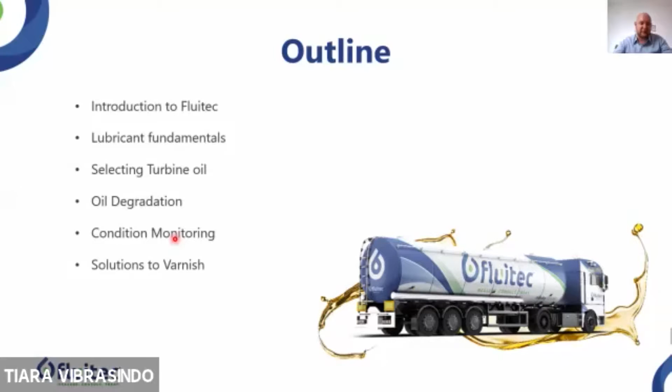We will share our knowledge on monitoring the condition of turbine oils, how you can prevent breakdowns, and we will present our solutions to varnish. It's quite a lot of content, quite a lot of topics to put into 1.5 hours, so I need to keep the speed and will probably be a little quick. But as I said earlier, if you have any questions, please don't be shy to chat with us, and we will follow up when we can.

To introduce Fluitec, we are on a mission, I should say, to achieve Fill for Life. Now, Fill for Life is a big goal. It's difficult to reach, but that's why we are in business. We want to extend the fluid's lifetime in the equipment to a point where you don't have to change it anymore.

We are not there yet at the moment, but we are getting close. And by doing this, we have actually been approved by major gas turbine OEMs. We have saved more than 1.5 million gallons of oil from being wasted prematurely.

9 out of 10 global oil companies actually use or recommend Fluitec solutions. We are doing business in over 100 countries on six continents.

And probably the most important is here in the middle, we have managed to reduce more than 100,000 tons of CO2, which is documented. In reality, it's probably more. And by using our solutions, our customers, the end users, have documented more than $100 million

of savings. And we've also managed to save a lot of days of outages for our customers, the end users. For example, in the power generation industry, it can save a lot of value if you don't have to do a lengthy shutdown for preventive maintenance.

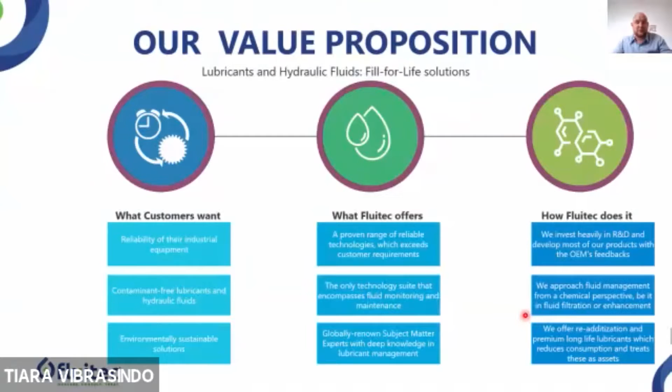And we approach fluid management from a chemical perspective. That can be treating of fluids or filtration, chemical filtration of fluids. We offer re-additization and very premium long-life lubricants, which reduces consumption and reduces the downtime of your assets.

So the product line that we have - recently we have added the product line called Education, because we have found that our knowledge is actually an asset that we can share with the industry and our customers through this kind of webinars. So that's called Education.

We have Lubrication Academy as our own webinar, and the virtual summit which we held last year will be held this year as well. The other one is condition monitoring, to monitor the conditions of lubricant.

We have invented Ruler and MPC, which are according to ASTM standard and recommended by major OEMs. Contamination control products are unique products to filter out oil degradation byproducts and to prevent the formation of varnish in your system. And Solvencer is either deposit control, contamination control, or the replenishment of depleted additives such as antioxidants.

So we have a wide range of products available. So by doing this, the way that we do it is different from how it is traditionally done.

So traditionally there has been low analysis and low frequency. There's a lack of data related to oil analysis on our customers. Aggressive cleaners are being used, and they replace lubricants whenever the additives are depleted, or when the lubricant becomes spent, it just gets thrown away and a new lubricant gets into the system. Filtration media basically has not changed since the 1950s and are actually not so efficient for current day standards. There's frequent oil changes and no warranty given by any oil suppliers on degradation.

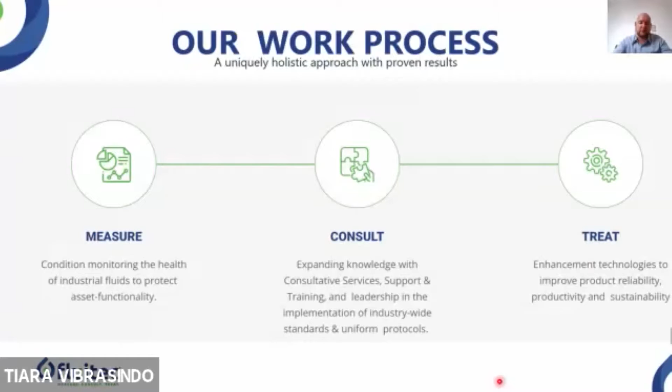The reason why customers trust us is because we have unique and superior products. There is no other company at the moment like FluidTech that can offer this wide and holistic view on things. Sure, there are specific competitors in certain areas, but we have a unique view from our specific experience in lubricants. So that's how we can tailor our solutions to each customer.

We prioritize science. Of course, we are a commercial company, but we develop our solutions on a scientific basis and with science in mind. We have 25 years of proven track record and industry-specific experience, and we are recommended by major OEMs and major oil companies.

And by doing what we do, we add value. We increase the customer's efficiency and the reliability of their production facilities. And by doing so, we actually create a very unique return on investment on our solution. In many cases, it's not difficult to calculate how much our solutions will save the customer in money and also efficiency. Our unique approach ensures a risk-free solution.

By using our experience and by tailoring our solutions to the customer, it is risk-free to use. So our legacy is that we want to achieve zero industrial waste. This is something that major economies are now looking into, a circular economy. Instead of consuming things and throwing it out, we want to reuse and extend the life cycle of industrial fluids and contribute to the zero industrial waste and circular economy environment.

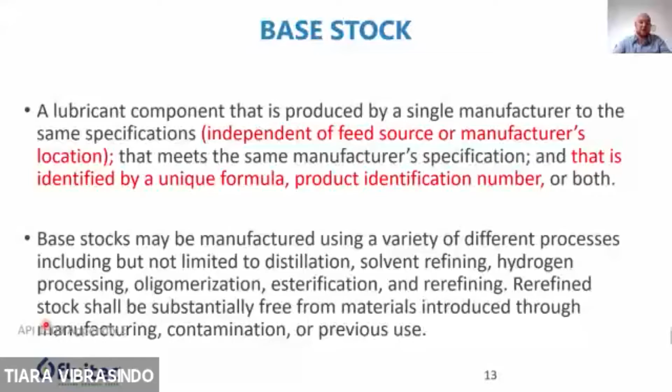So the base oil is very important because it is the platform on which the additives ride. So the base oil is performing the major functions of the lubricant. It provides a lubrication film, it provides the minimum viscosity, and it needs to be strong, stable, and inert.

It needs to be non-damaging to your equipment, and it needs to be kept clean and pure. So very important about base oil is the lubricant cannot perform without a clean and pure base oil. And this is very important, and I want you to remember this today. If there's anything you take away from our presentation, please let it be that the base oil in our lubricants needs to be clean and pure for the lubricant to perform.

And this is the basis of everything that Fluitec does. All our solutions are tailored around keeping the base oil clean and pure, so it can provide its major function as the backbone of every lubricant.

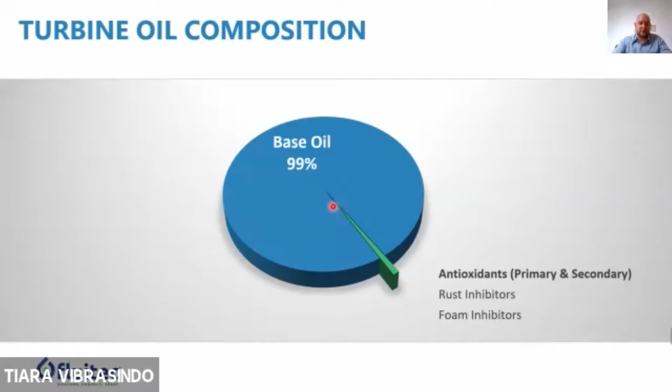Now, if you look at a typical turbine oil composition, you will realize why the base oil is so important, because it consists of 99% of a lubricant. So most of the performance of a turbine oil comes from its base oil. The rest is mainly antioxidants, rust inhibitors, and foam inhibitors. Relatively simple composition, but it has a very important job because it goes into high-valued assets such as big turbines in power generation units, for example.

So a little bit about the different base oil groups. There has been an evolution in the lubricant market, or maybe even a revolution, because most of the formulations over the past 10, 15 years have gone from a group 1, which is crude oil that has been subjected to solvent processing, solvent extraction. That's the way it is refined, and this leaves some unsaturated and polar components in the base oil, and you can see this from the color as well. It is a bit lower in purity than a group 2.

So we moved from group 1 to a group 2 over the last 10 to 15 years. Now, group 2 is a base oil that is refined by process conversion of molecules. This removes the unsaturated and polar components, so it has a higher purity. With this higher purity, it increases the oxidation stability because it reacts better with antioxidants, so it will be better suited for applications that require good oxidation stability, like a turbine oil, for example. It has very low aromatics.

Now, there's a little bit of a downside to this. A group 2 may have some solvency challenges versus a group 1. This becomes an issue when you think about varnish, because when varnish starts forming in your oil, previously a group 1 could keep it in solution and it was harmless, but a group 2 might not be able to keep it in solution, and it becomes varnish and attaches itself to the metal, and that's where it can be harmful. So this change from group 1 to group 2 has significantly increased the varnish problems that we have seen in the market.

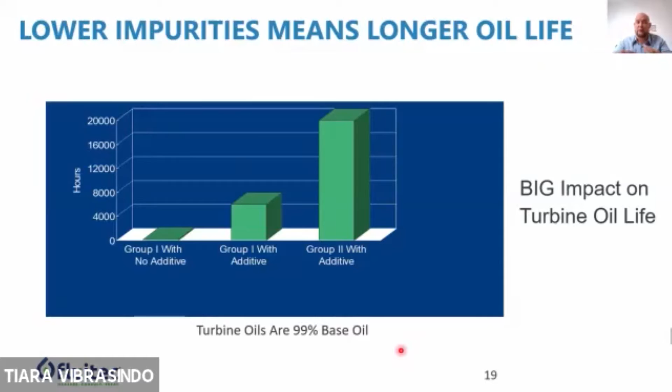And this is why we use a group 2 today, because oxidation stability is more important than solvency. But the downside, the price that we pay for this, is that we have more varnish in our system. So we need to put in a little bit more effort and investment into managing the oil in our system.

Another oil that's being used is a group 4 PAO, which are synthetic molecules, also called designer molecules. They have performance benefits in terms of temperature stability and even better oxidation stability. But they are even more limited in terms of solvency. They are the purest base oils in the market, so they lack some of the lubricating properties and some solvency. Also, another challenge with group 4 synthetics is that they are challenging to formulate with because of these properties, but also that they are not as widely available as mineral base oil because they need to be produced, they need to be synthesized. The availability is much lower, which of course, supply and demand, leads to a much higher price for synthetic base oil. So that's why you don't see them so much in turbine oils these days.

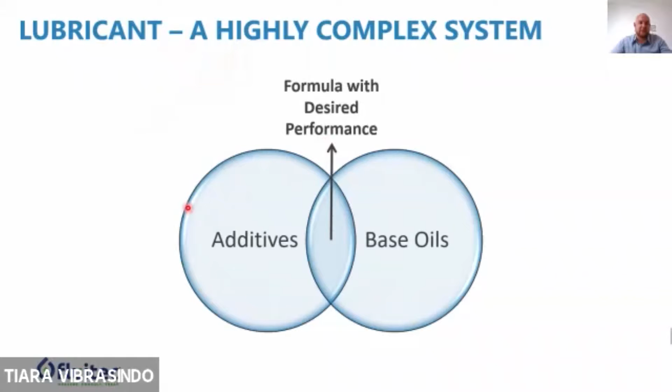So I want to talk a little bit about the lubricants in general. It's a highly complex system, a combination of a careful selection of additives which need to be tested thoroughly with the right base oil. This is more difficult to do than it looks on paper, and things need to be properly tested and performance needs to be evaluated, and then you end up with a formulation which hopefully will have the desired performance. So it's always a combination of chemistry and base oils.

The main function of the additives is to prevent oxidation, because oxidation is a degradation of the base oil. If you remember from our previous slides, it's important to keep the base oil clean and pure. Oxidation occurs when oxygen molecules attack the petroleum fluids, and they literally start to degrade the hydrocarbons, the molecules of the base oil. This leads to free radical acid formation, sludge and varnish formation. Eventually the oil will thicken and the lubricant will start to decompose altogether.

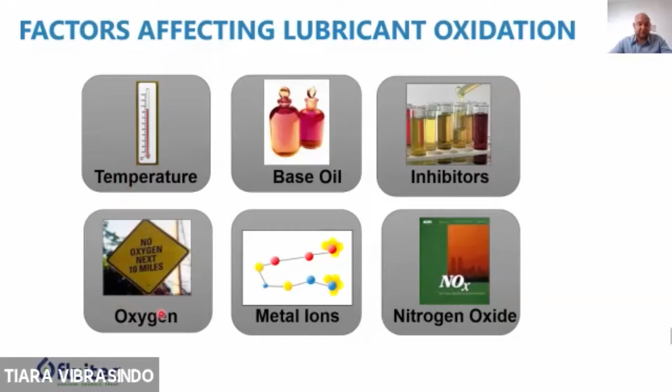This is the main enemy of any turbine oil, because it's accelerated by environments found in a turbine oil, such as temperature. Type of base oil will be important to the way it oxidizes as well. The amount and type of oxidation inhibitors will be very important to the rate of oxidation of the oil. The presence of oxygen, which is almost everywhere, metal ions, and nitrogen oxide - these are the factors that increase oxidation of an oil. And of course, temperature, oxygen, metal ions, these are all present in turbine oils.

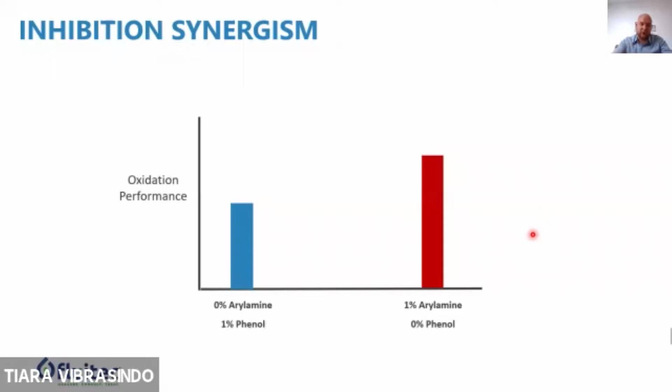So if you look at antioxidants, you say, why don't you just pack the oil with antioxidants? Well, it's always a synergy that you're looking for. You cannot just pack, for example, arylamine or phenolics - you want to have a combination of both because this gives you the best performance. You can see here 0.5% of amines and 0.5% of phenolics give you a better performance than 1% of each of those. So we're looking for the synergistic and enhanced performance.

You might also wonder, why don't you just increase the amount of antioxidants in your oil? Well, the answer to that is technical, but also economical. From a technical standpoint, antioxidants are molecules that deplete over time. Typically you have one antioxidant and one free radical, and they battle with each other, they cancel each other out. So if you have one free radical that's neutralized, you also lose one antioxidant molecule. When this antioxidant molecule gets inert, it can become something else - sludge, varnish, or any other degradation byproduct, or even a free radical over a long period of time. So you also want to limit the amount of antioxidants you put in your system, because it can lead to a problem over a longer period of time.

Another factor, of course, is cost. If you increase the amount of antioxidants, antioxidants are expensive, so the formulation cost shoots up immediately, because the antioxidants are by far the most expensive chemical in turbine oils.

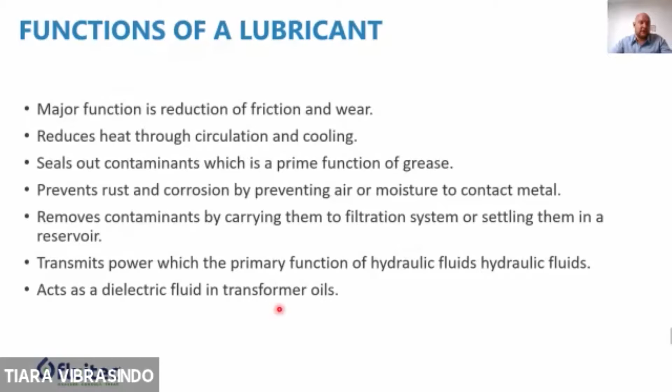It actually has a cleaning function, which is lesser known, but it helps to keep surfaces clean and helps to take away contaminants and settle them in a reservoir. In some applications, a lubricant is also a power transfer fluid. Think of a hydraulic fluid, where the piston transfers power through the lubricant. Also in an ATF, an automatic transmission, part of the power is transferred by the fluid itself. In transformer oils, it can also serve as a dielectric fluid.

I want to talk a little bit about different lubrication regimes, for you to understand what lubricants typically do. One of the severe regimes is called boundary lubrication, where you have mixed metal-to-metal contact, a very thin layer of lubricant, very high pressure, high load on the surfaces, and slow speed. These are environments typically found in gear oils, for example.

Here you need a lot of surface active chemistry at the contact points to prevent the metal from wearing off. You need a lot of extreme pressure additives, anti-wear agents, and friction modifiers. So it's a very specific formulation.

Another very challenging formulation is mixed film lubrication. Here you have a combination of metal-to-metal contact, but also a little bit of hydrodynamic lubrication. This is probably the most challenging formulation because you need some surface active chemistry, wear resistance, and friction modifiers, but you also need good hydrodynamic properties of the lubricant. This is an environment typically found in engine oils, for example. That's why engine oils are extremely difficult to formulate.

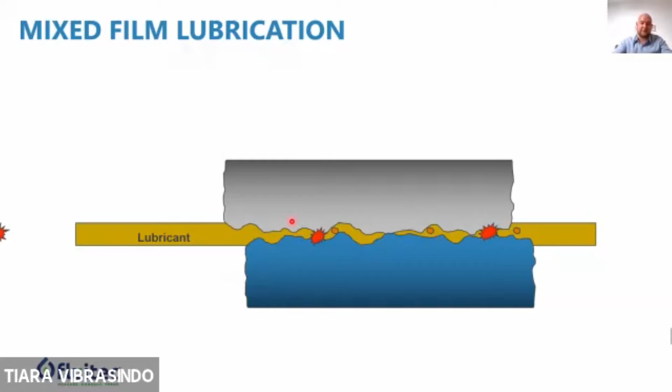Now, the most common form of lubrication in turbine oils is actually hydrodynamic lubrication, meaning there is more space between the metal surfaces and the lubricant fills up the space, and you only have lubricant as a film. There's no metal-to-metal contact present. Typically this is in applications where you have high relative speeds between the metals. You can imagine in a turbine or in a bearing, for example, those have hydrodynamic lubrication. So in turbine oils, we look at hydrodynamic lubrication.

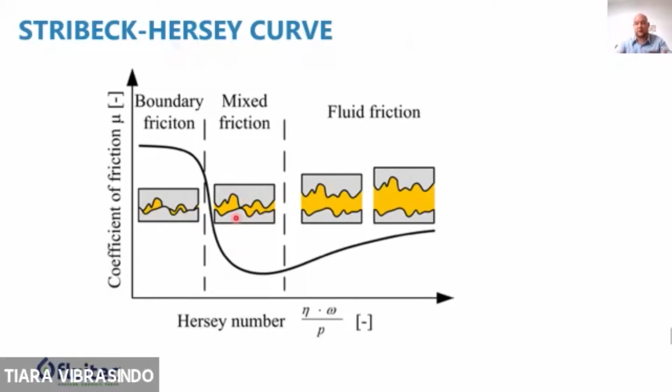This is just to explain to you, if you look at all these different lubrication regimes, you have boundary friction, mixed friction, and fluid friction. They all have a different coefficient of friction and a different relative speed to each other. That's why you cannot use, for example, a gear oil in an engine oil and the other way around. They won't work - the metal will start to degrade and it will break down the machine. So it's very important to use the right lubricant for the right application.

That's basically the main message of this section. So when we look at lubricant functionality, we always have to balance out the properties, because you can go all the way to the side of performance. We can formulate synthetic fluids packed with high-end chemistry inside, and the lubricant will almost not degrade and will not cause any problems. But then it will be way too expensive - it doesn't make sense to use it anymore.

And also you will run into availability problems, because highly synthetic molecules are limited and difficult to produce. So you cannot make enough of it to supply the whole world. Availability is also a major problem. But in general, it will be a balance between the performance of a lubricant and the cost. That's why you're always looking at balancing the formulation in these areas.

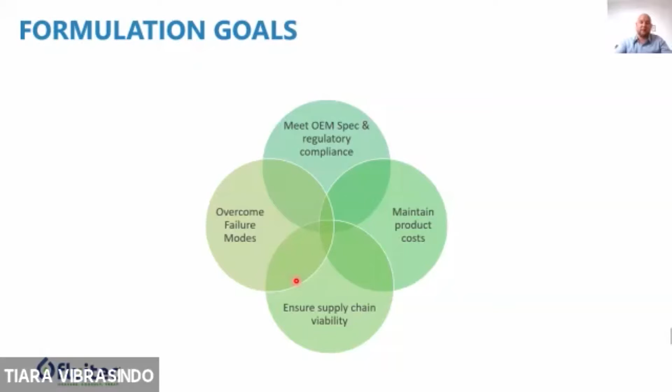You have the OEM, it needs to meet the OEM spec, it needs to have chemistry inside which is regulatory compliant. You cannot have heavy toxic chemistry inside, for example. It needs to be registered safe to import, because if not, customers cannot use it. It needs to overcome failure modes in the application, it needs to have an attractive product cost, and it needs to ensure supply chain viability, so it needs to be available worldwide. So this is a challenging prospect.

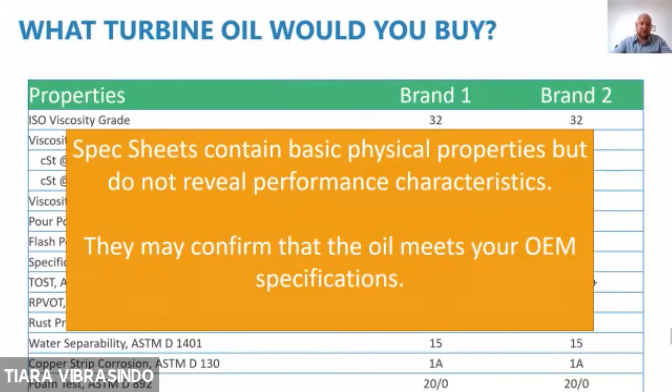They may confirm that an oil meets your OEM spec. So if on a spec sheet it says this oil meets OEM A, B, or C, okay, fair enough, that means the oil is tested for the application. If this is the spec recommended by your OEM, then this oil should be suitable. However, please do not select turbine oils based on spec sheets alone, and don't look at TOST or RPVOT as the sole indicator for oxidative resistance or lifetime of the oil, because it's much more complex than just these specifications.

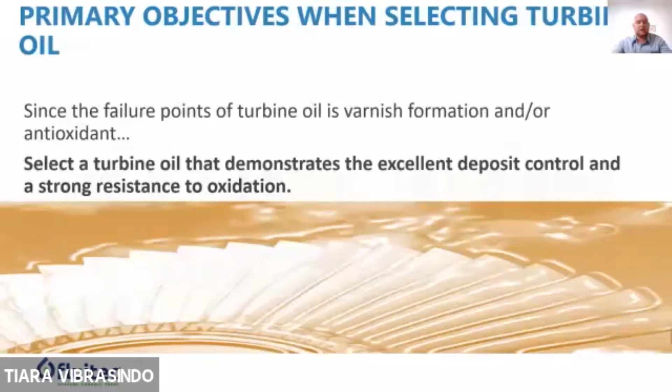So you want to be collecting relevant performance data. Because of the challenges we've seen in the market, we've developed an in-house test to determine which turbine oils demonstrate excellent deposit control and have a very strong resistance to oxidation, because these are the most important characteristics of a turbine oil. So we ran a couple of oils through our TOPP test, which is the Turbine Oil Performance Prediction Test. It's a test designed by FLUITEC, simulating real-world conditions, and a good test to evaluate the actual performance of an oil.

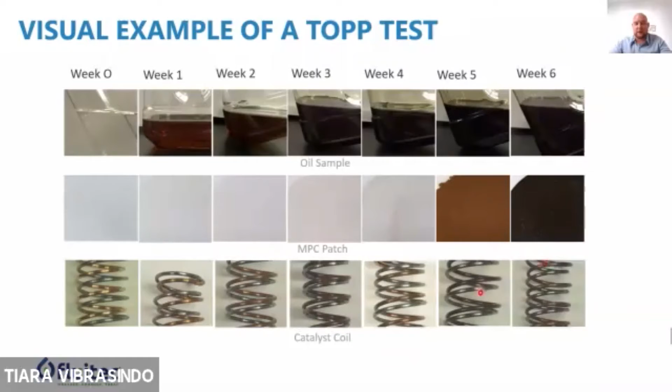Example of a TOPP test: after 6 weeks of thermal stressing, you see that the pure oil becomes very dark in color. You see the MPC patch turning dark as well. The MPC shoots up, and the catalyst coil that is used to increase oxidation - you can also see color changes on the metal there. So this is an example of a very poor performing fluid.

And if you look at what is mentioned on the data sheet, on the spec sheet of this fluid, it will say unique additive system, best deposit control turbine oil on the market. So a lot of these things are mentioned, but in the real world environment, they do not always hold value, because you can see the varnish potential of this oil is extremely high, and you do not want this in your system.

So if you run all these tests and collect all this data, how can you use this to come to a decision? We tested 9 commercially available turbine oils for 6 weeks, measuring oxidation resistance and deposit control. Results were compared, MPC values measured, and RPVOT compared to new oil using the Ruler test to determine remaining antioxidant level. By comparing this to new oils, we came up with an oxidation resistance index.

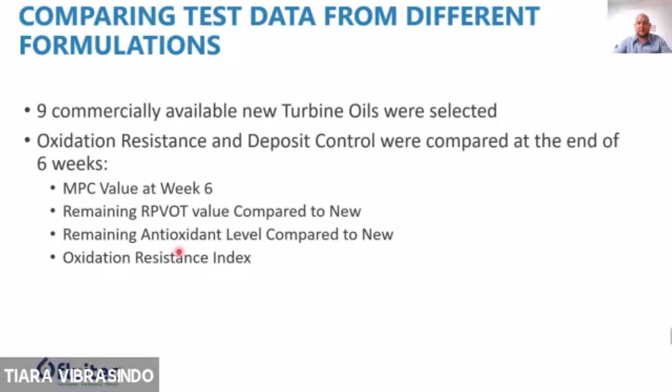So if you use this data to make decisions, it makes sense to come up with a ranking. What is important to you? Different production sites, environments, and applications can have different factors that are more or less important. For example, if you expect 15 years of oil lasting, you'll look at expected oil life, oxidation stability, and deposit control. If you want to change oil every 2 years, price may be more important. If you need a lot of technical support, then that will be more important.

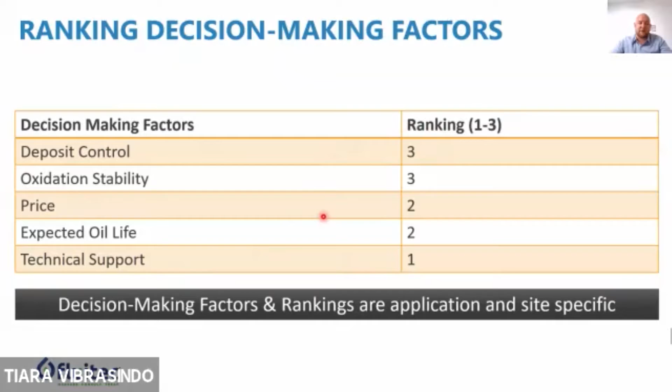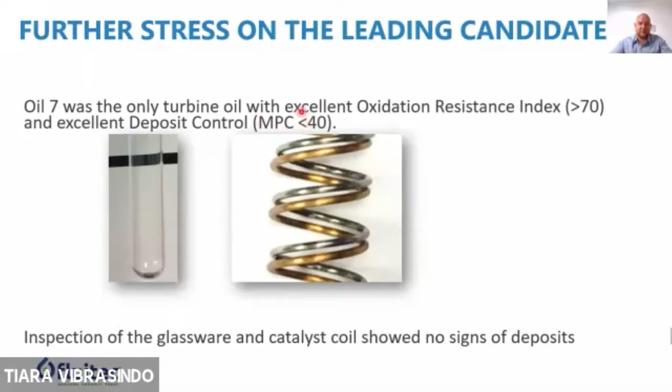We took brand 7 and further stressed it. We observed excellent oxidation resistance index and excellent deposit control, and inspection of the glassware and catalyst coil also did not show any signs. If you compare that to the poorest performing fluid, you'll see the catalyst coil is heavily varnished, the test tube itself was heavily varnished, and the MPC patch is almost black, with deposits already forming. So pretty bad.

The winning candidate, sample 7, was stressed for an additional 18 weeks, and the MPC value remained in the normal range with no signs of deposits found. This candidate was actually our own formulated Infinity fluid, formulated using Solvancer technology, which is very stable in terms of deposit control and does not form any deposits throughout the life cycle of the equipment. That's why this oil gives you long-term deposit control.

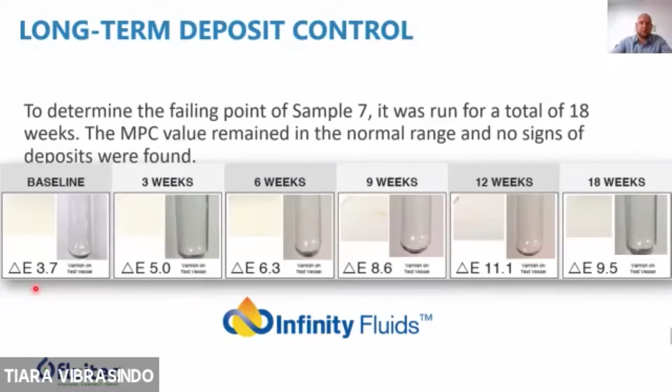So just to summarize this section: when we select a lubricant, the first step is to determine the primary failure modes of the application. You want to know how your application fails — how does a turbine fail, how does a compressor fail. For example, in turbine oil, the main failure modes are related to varnish formation and/or antioxidant depletion.

It's typically deposit formation inside your system, which leads to temperature spikes and vibration. In the end, the lubricant will degrade to the point it cannot perform its function, and your system will break down. Antioxidant depletion will lead to oxidation of your equipment, and as such will lead to breakdown. So this is the most important thing you want to measure in a turbine oil.

So you have to develop test data or ensure that the lubricant you're using is tested according to its ability to overcome these failure modes. It makes sense to develop a ranking matrix as we have shown, and you should select the oil that provides the highest value for your application and for the way that you intend to use it.

So we have completed now the section of selecting turbine oils. Now I will go a little bit further into oil degradation. I would like to show and share with you how oil degrades in turbine oils, and what are the primary failure modes that you see.

For turbine oil degradation, there are a few major factors taking place. Number one is oxidation, as we explained - that's a very important degradation mode. Another one is thermal degradation, which can happen through static spark discharge. When you have a filter and the oil passes by it, there can actually be spark discharge, creating hotspots.

Microdieseling is pressure-induced thermal degradation - I'll explain that a little bit further on. Hotspots in your system can lead to accelerated degradation. External contaminants such as gas, solid particles, or water, and other modes of failure and degradation can be drop out of the additives or incompatibility. We'll look into these a little bit more deeply.

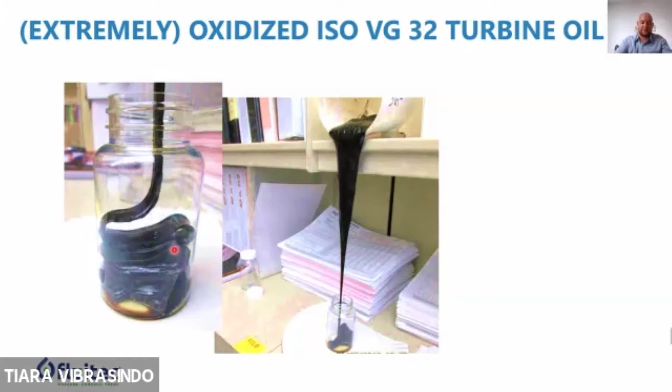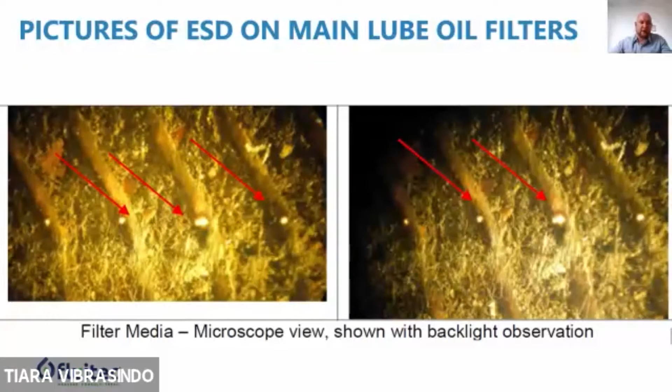So here you see the effect on the main lube oil filters of electrostatic discharge. You see the coking, the carbonization materials getting stuck in the filter. Here also you see the particles on the filtration system.

Another common thermal degradation is through hotspots. So you'll get carbonization of a layer of oil that is being subjected to high heat. So you get changes of the molecules, and then it cannot perform its duties anymore. And it will lead to lacquer and carbonaceous deposits forming inside your system.

So let's stop the video.

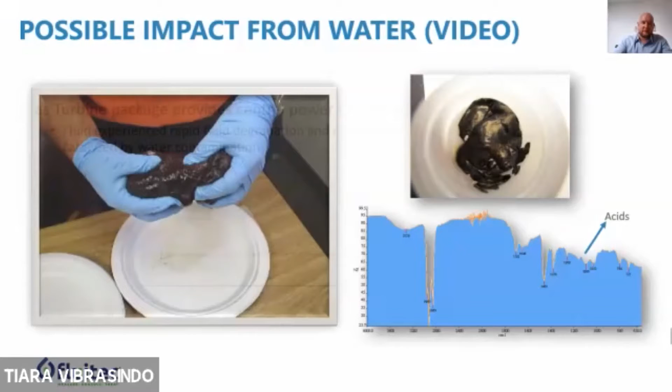So that's an extreme example of water in the system, which leads to extreme oxidation, because water can act as a catalyst, and you'll see the viscosity of the fluid shooting up to a point where it actually becomes kind of a goo. And here in this graph, you can see that this is actually done through acid formation.

We analyzed this goo, so to speak, and we found out that there were certain acid formations that were causing this. So you need to install, for example, acid scavenging materials to prevent this from happening.

So here you see a gas turbine package that provided power to a university campus. Again, sudden fluid degradation due to extreme oxidation, which was catalyzed by water formation and water ingress.

It's also very important to flush systems that have been having these kind of issues, because there will be residual deposits and varnish in your system. So before an oil change, you can add the Boost VR, which is our product, which will help to clear the system before an oil change, but you can also flush during your downtime.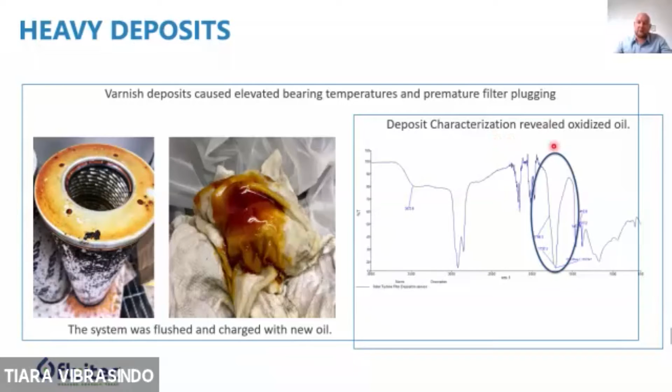Deposit characterization revealed that this was caused by oxidized oil. Here you can see in the steam turbine on the tube there is residue which inhibited the equipment from performing, and we have analyzed the deposits and we saw that they were acids and silicas, and so also a result of oxidation leading to deposits here.

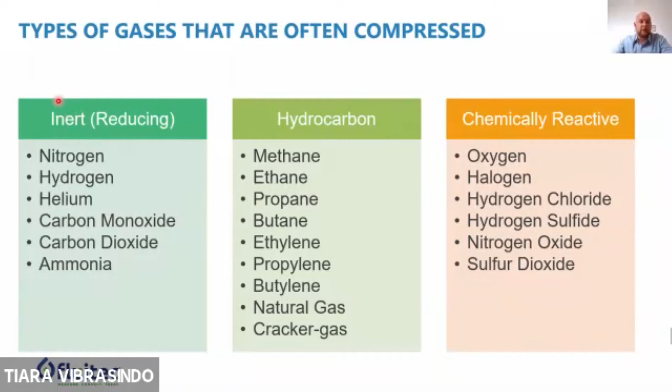So there are a lot of gases that are often ingressing into turbines. Now there is this old knowledge that says inert and hydrocarbon gases have no chemical effect on the oil. This is one of the fights that we are fighting in the market, because this conventional wisdom is actually not correct. Because we have found through our experience that inert and hydrocarbon gases can actually chemically react with the oil, and they actually lead to some of the most severe degradation situations that we have seen in the market.

So, for example, if you look at an inert gas such as CO2, it can actually react with water to form a carbonic acid. So oil has, for example, 8 to 12% of air, 21% of which is oxygen. So you can imagine that this is already a reaction product that's by design basically always in your oil.

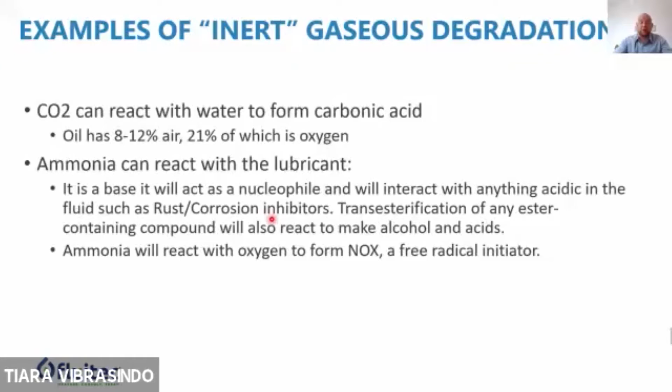Ammonia can also react with the lubricant. So if ammonia reacts with the lubricant, it will react with anything acidic in the fluid, such as rust and corrosion inhibitors, and it will react with those to make further acids and alcohol, which will degrade your system. And ammonia will also react with oxygen to form NOx, which is a free radical initiator.

So here we have an example of this in the real world. We actually have a case study by a nuclear power plant in the US, which had 2,700 liters of ISO 32 turbine oil, an MPC value of 16, and ruler phenols were at 75%. But it experienced pump valve sticking, and the unit had to be shut down for 30 hours to investigate the problem. Now, 30 hours for a power plant, as many of you will probably know, can run into extreme costs.

So here we have documented that it's about 1 million dollars US that was caused by this outage. So a high-profile root cause analysis was performed to determine and to fix the cause. Of course, in this situation, the customer will not spare any expense to get to the bottom of this and prevent this from happening again.

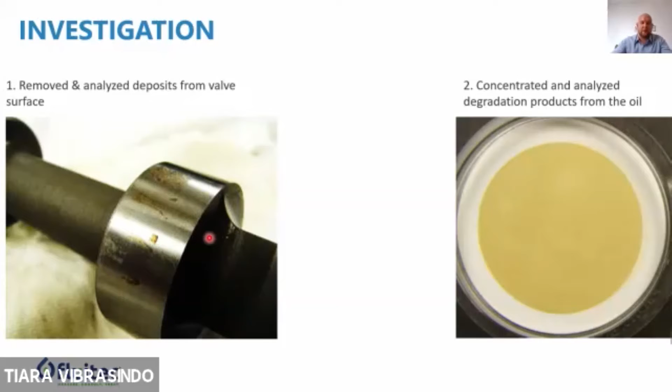So we have removed and analyzed deposits from the valves, as you can see here, and we concentrated and analyzed the degradation byproducts from the oil. The chemistry of the deposit from the valve matched the deposit in the oil, so we know that the problem that led to valve sticking is actually coming from the oil. That's what we determined here.

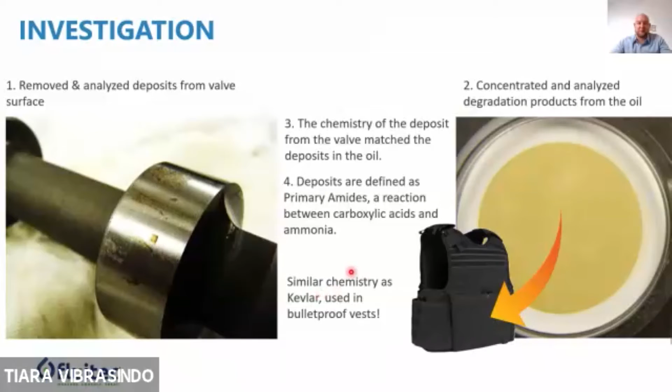The deposits are defined as primary amides, a reaction between carboxylic acids and ammonia. These are byproducts of oil degradation, primary amides, and they react with ammonia to form these deposits. So the chemistry being formed in the lubricant is actually similar to Kevlar, which is used in bulletproof vests. So you really don't want to have this inside your system.

So the conclusions and action that we took: ammonia was present in the plant's steam, which was a result of the way it was produced. So you have carboxylic acids plus ammonia forming chemically related deposits consisting of amides. It was not feasible to remove the sources of ammonia from entering the system, because that's just not possible for this plant.

So what we did is install a system to remove oil degradation byproducts, which are the carboxylic acids. So we removed this part from the basic chemistry of the oil, so this reaction cannot take place, and the deposits are not formed. In addition to MPC, the plant is also monitoring with FTIR to measure the acidic content and keep check of amide production. So here we have stopped the problem at its core, and of course this customer was very happy with this.

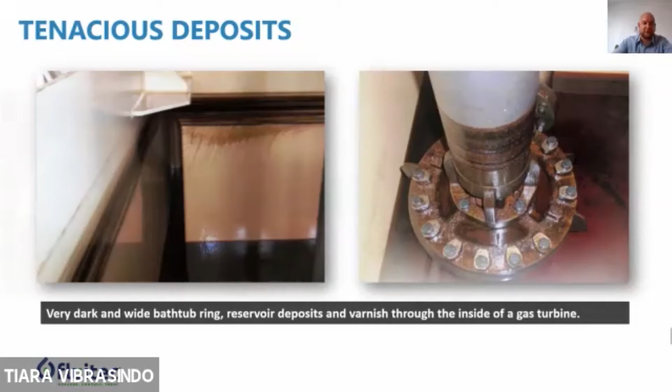You can see here how it looks on the piping, so you can imagine this can lead to issues. Also, this kind of deposit is like lacquer, so it's impossible to wipe off. You need to use heavy chemicals to remove it, which is not advised, because even residual chemicals can go into your oil and prevent it from performing its duty. It's never advised to use detergents in cleaning of oil tanks.

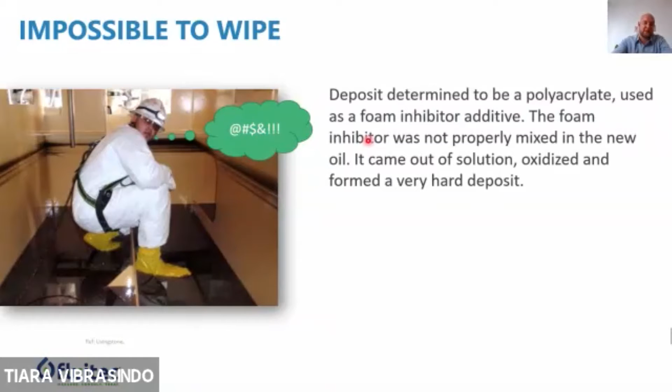So here you see a worker trying to clean the varnish that is in the system. In this case, the deposit was determined to be a polyacrylate, used as a foam inhibitor additive. So it's actually an additive in the formulation that came out of solution, started oxidizing, and formed this very hard deposit.

Another use of polyacrylate absorbent material is actually in baby diapers. So the chemistry is very interesting in this.

New formulations have various base stocks and additive components, as we discussed earlier, and they are not always compatible with each other. For example, most group 5 base stocks are not compatible with mineral oil. Old foam inhibitors may not be compatible with newer type foam inhibitors — they have different chemistries, so they cannot always mix. Different kinds of rust inhibitors can also be incompatible. Overall, mixing different chemistries is never advised.

Even if you test two new oils together and they might be compatible, if you do the same with used oils, you might run into compatibility issues with the same oils, because when an oil is in operation, when it's in service, it chemically changes. So there are chemistry processes taking place inside the oil.

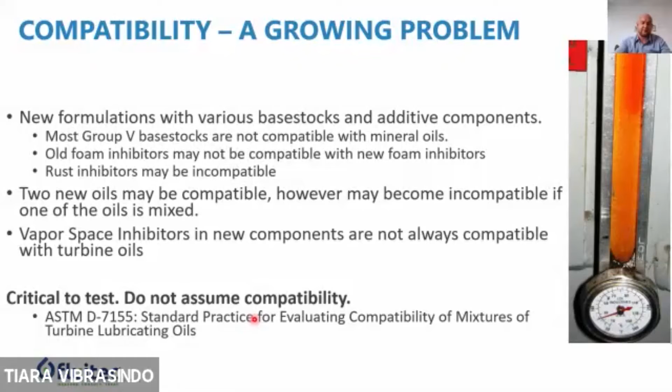So they are different in composition compared to a new oil. Mixing new oils to check if your in-service oil is compatible with another oil will not work. That's why it's critical to test. Never assume compatibility. ASTM D7155 is the standard for assessing compatibility of mixing turbine oils, and our solutions are always tested for compatibility.

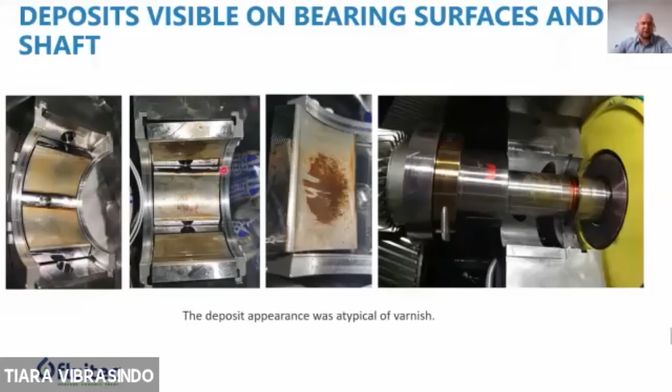But here's an example of a compatibility problem we encountered in a compressor. Six months after installing, the bearing temperature started to go up, and oil analysis results indicated no problem. But after assessment, we saw deposits visible on the bearings and shaft, which were very atypical in appearance of varnish. It was very light in color and looked softer, a little like rust scattered on the metal, but that's not what it is.

It was very atypical, so when we magnified it after solvent extraction, we saw that the varnish deposits were insoluble, and we performed an analysis to determine what they were.

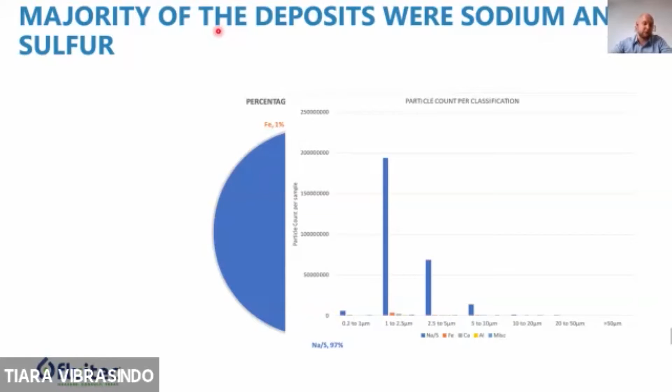The majority of the deposits were sodium and sulfur. Sodium is used as a dispersant in oils, and sulfur is an EP additive. In this case, the sodium could come from the additive chemistry or from external environments, but the sulfur is definitely from the chemistry of the oil.

This typical oil formulation did not contain sodium, but the compressor was not flushed during commissioning, so there was some preservative oil remaining in the system. That's a great example of incompatibility between two different oils. The residual rust preservative oxidized and formed deposits on the hottest areas of the equipment, which is always the area that leads to problems. That's why it's always severe, because the problem will not occur somewhere inert. It will always occur at a critical point where it actually becomes a problem.

So a little summary about oil degradation: it's important to realize that varnish is just a word, but definitely not all varnish is the same. It makes sense to do a root cause analysis to figure out exactly what varnish you're experiencing, how it originates, and where it comes from. There are multiple mechanisms that may cause oil failure and deposit formation, and getting a sample of the deposit can help identify the cause and point to a solution.

We see a lot of operators take pictures, but they don't take samples. This is actually a missed opportunity, because if you keep some of the deposits and have them analyzed by us or by an independent lab, you can find out in many cases what is the cause of these deposits.

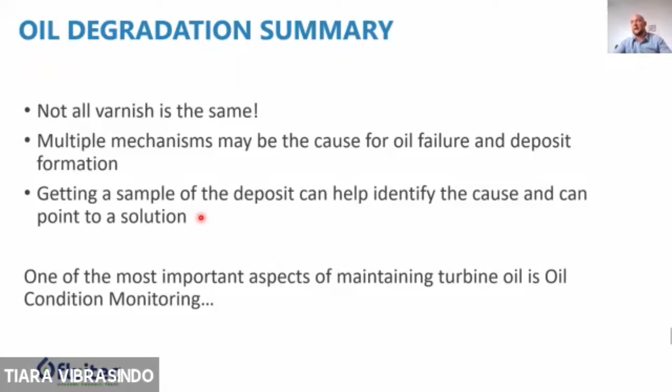So one of the most important aspects of maintaining a turbine oil is actually oil condition monitoring, which neatly brings us to the next topic. I'll check the questions, but I'll try to save them for the end since I'm a little behind on time. So we'll treat some of the questions at the end, and I'll continue now with oil condition monitoring.

Oil condition monitoring starts with sampling; this is always the first step. The objective for sampling is to maximize data density—you want to get as much quality data as you can. You want to minimize data disturbance and have a proper frequency. You can sample too much, which can be detrimental, or more often too little, so you want to determine a proper frequency for your application.

Some considerations for sampling include sampling from a proper location, using the correct sample hardware and sample bottle, and putting in place a correct sample procedure, because with sampling it's very simple: if you put garbage in, you get garbage out. So in order to get usable data...

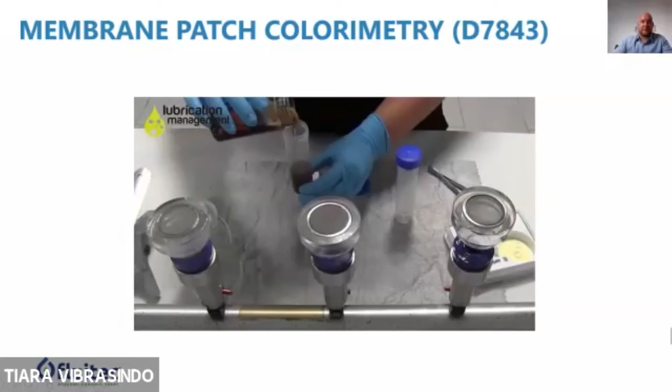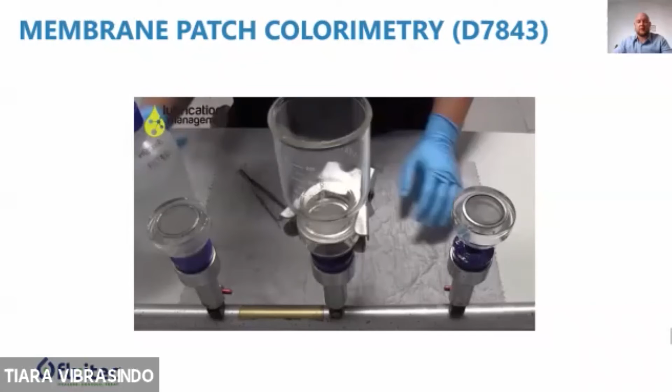But at Fluitec, we have developed an MPC test called membrane patch colorimetry, which is categorized under ASTM D7843. Here's a short video of this test and how it works. You will see that it generates a patch, and you run three parameters to determine the delta, which is then categorized as the MPC value. Here you can see an example of the patch.

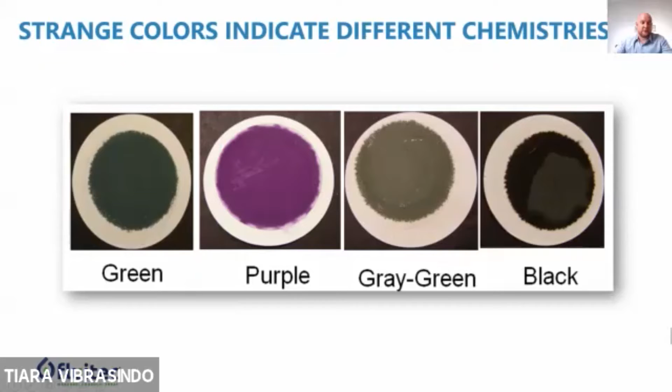And remember, the color of an oil is not always related to the varnish potential, because very often people think when my oil is dark, it will be varnish and I have to throw it away. But that's not always the case. Color change of an oil can be due to various circumstances. Some can be detrimental, some can be very harmless. So oil color is not representative of oil performance.

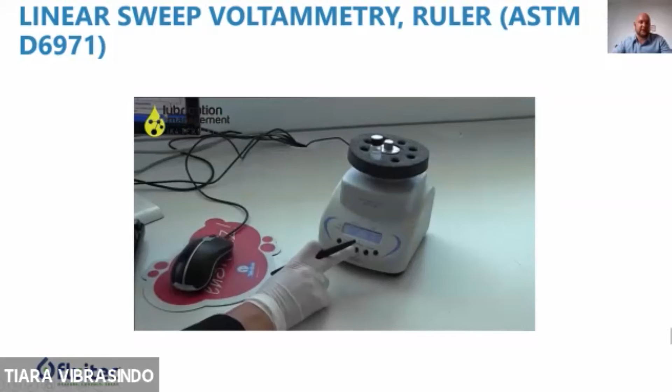Another very important test to consider is linear sweep voltammetry, or RULER. RULER stands for Remaining Useful Life Evaluation Routine, which is categorized under ASTM D6971. It uses our proprietary RULER equipment invented by FLUITEC, and it actually measures the amount of antioxidants that is left in the oil. So you see here on the screen the RULER graph that is being generated by the technician.

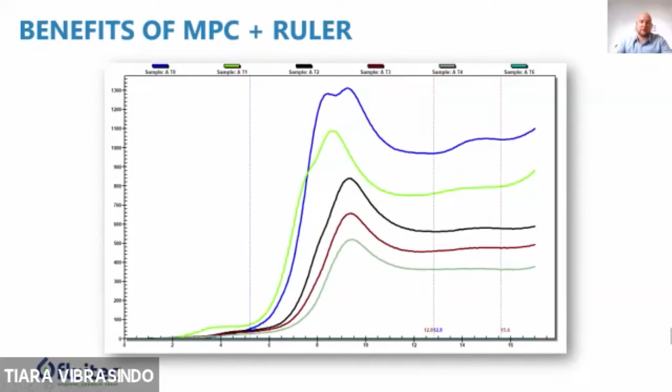It becomes more interesting if you correlate your RULER tests with an MPC test, because you can actually determine different kinds of failure modes and varnish chemistries that are taking place. So if you do an MPC test, combine it with a RULER. If you want to do a RULER test, combine it with an MPC, because you might be able to make some interesting conclusions following this test.

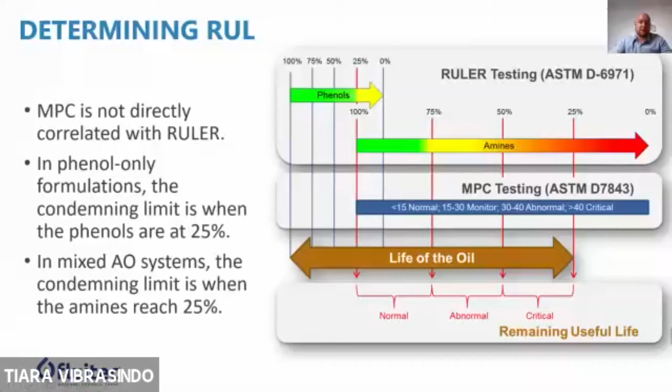So if you look at the remaining useful life overall of an oil, you want to correlate MPC and RULER. For RULER tests, the phenols typically deplete first, and then the condemning limit for the amine antioxidant level is about 25%. That's when you really want to think about changing your oil or adding additives to increase the antioxidants again. For MPC testing, anything between 15 and 30 is monitor, between 30 and 40 is abnormal, above 40 is critical. So if you correlate these, you can determine the life of the oil, whether that's normal, abnormal, or when you're at a critical stage.

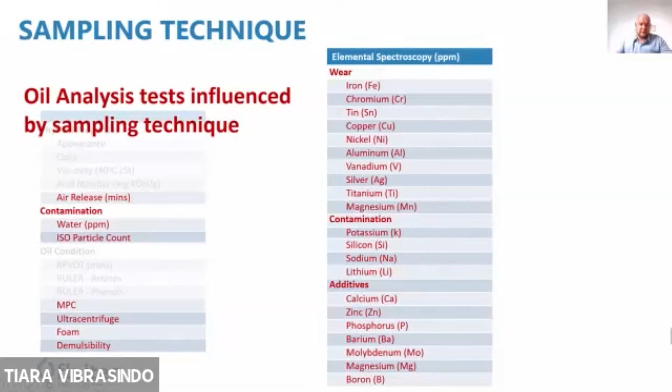So if you look at an oil analysis, this is a typical oil analysis test slate. How do you want to interpret this kind of analysis? For example, it starts with sampling. Oil analysis tests that are influenced by sampling techniques can be the air release properties, the contamination, because if your sample bottle is contaminated, you will see this back in your oil analysis. All these wear metals can come from outside if the sample technique is not proper. So it's very important to use proper sampling technique.

So if you look at interpreting oil analysis reports, it usually starts with viscosity. There's this saying in the lubricant world, there are 3 main important aspects of an oil, which are viscosity, viscosity, and viscosity. So everything always starts with viscosity. You check that, then you check if there are any wear metals inside the oil, then you look for contamination, then you look at varnish potential and oxidative health, and you combine this with other fluid properties to make a holistic analysis.

So what you want to do for proper oil analysis interpretation is look at data points. You need to have a record of sampling, and you trend the data to see where it's going, so you can make preventive analysis. Find correlation between results and take action. You want to use this data to come out with preventive or reactive monitoring.

Make sure, number one, that the viscosity is correct. As a matter of fact, 99% of the time, we'll see that viscosity is correct. It's very rare that viscosity is affected by degradation, and if it is, it's already a very severe degradation. But it's the first thing you want to check.

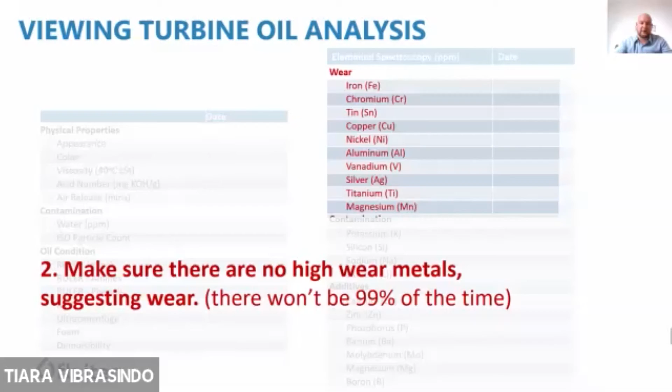So then you determine if the oil is contaminated. For example, a very common contamination can be water ingress. You look at the amount of water in the oil, and there's the ISO particle count measurement, which will generate a number related to the oil cleanliness in terms of the particles inside. External contamination can come from several elementals, and you look at additive levels, which are typically found in lubricants.

For example, with increased water ppm or ISO particle count, you can have a coolant leak. Maybe there's a filter change required, maybe your filters are saturated, or it can be due to a sampling error.

If you have contamination of these elementals, you could have, as I mentioned earlier, it's not advised to use detergent when you clean the oil tank, because this can end up as contamination in your lubricant. It can have cross contamination with another lubricant. Maybe you've topped up the oil with a non-turbine oil formulation, leading to contamination, and so on. Phosphorus, for example, is an EP additive and an anti-wear additive used in some turbine oil formulations, so don't be disturbed if you see this.

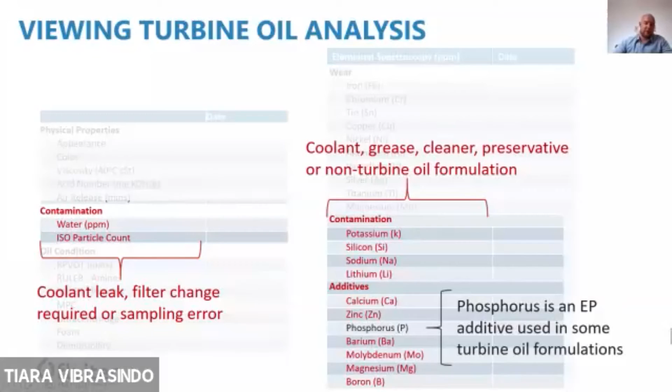So what is varnish potential and oxidative health of the oil? These are typically measured by a combination of RPVOT, designated in minutes, the RULER test, which we've shown earlier, which measures primary and secondary antioxidants, MPC for varnish potential, and the ultracentrifuge test as well. These give you a good idea.

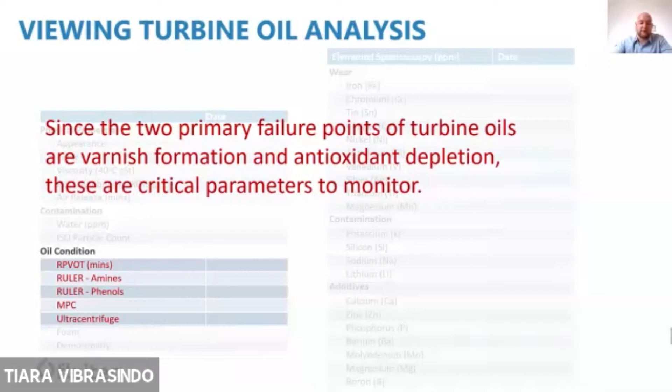For turbine oils, you really want to consider these tests because they are extremely important. As we explained earlier, those are the two primary failure points of turbine oils: varnish formation and antioxidant depletion. So you really want to keep an eye on the varnish potential of your oil and the antioxidant level.

The condemning limit is when RPVOT is lower than 25% of a new oil, or when the RULER amines drop to 25% of the new oil. For MPC, action should be taken when MPC is higher than 30. You can also combine this with ultracentrifuge - some labs will do that to give you an even more thorough picture. Action should be taken there when it's equal to or greater than 2.

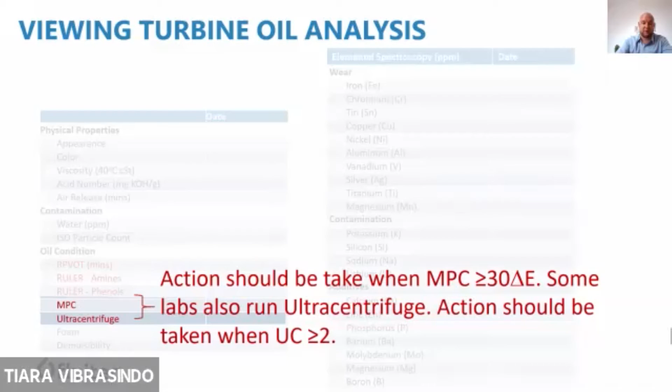For MPC, trending is also very important, because maybe your MPC is still below 30, but if it trends from 5 to 25 within 3 months, you would also want to take action, because that might indicate a problem in your oil as well. So trending data is very important.

Other fluid properties can be acid number, air release, foam, and demulsibility. Foaming will be influenced, for example, by contamination as well, such as water ingress into the oil - you will see this in foaming and demulsibility. Acid number will only be affected at a very late stage of degradation of the oil. Typically, we will see that for hydrolytic oils, which are for example phosphate esters, they attract water, and when they attract water, you will see that they start to become acidic after a while. That's a typical application where you want to keep an eye on the acid number, because it can indicate a problem with the hydrolytic properties of the oil.

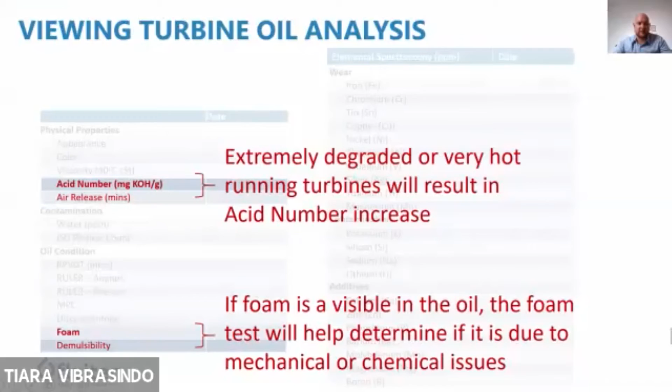If acid number increases, it means your oil is already extremely degraded, and only very hot running turbines will typically see acid number increase. Air release and demulsibility are influenced by base oil degradation and contamination. The demulsibility is important because it's the oil's ability to keep water or other contaminants outside of the oil.

So a little bit about some practical case studies and the importance of trending and correlation in this case. Here you will see that if you look at the trending of the RPVOT, and correlate this with the RULER and MPC content, you will see that as the amines and phenols go down, the RPVOT goes down, and the MPC creeps up.

If you look at this in a graph to make the correlation, you will see the RPVOT here as the blue line. It will go down alongside the RULER amines and the RULER phenols, which have depleted very quickly here. So you can see the correlation between RPVOT and the MPC going up.

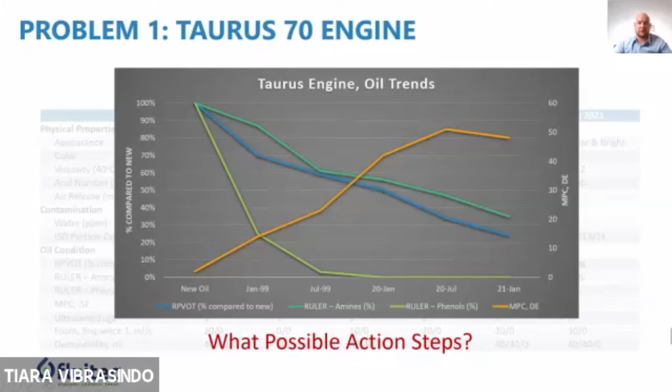So all these tests are related, and you can make correlations that show you need to take action here in order to correct the oil. Possible action steps in this case are to install varnish mitigation systems and to increase the antioxidants, or re-additize the oil to bring the RPVOT back up to an acceptable level, so you do not have to change the oil. But of course, changing the oil is also an option in this case.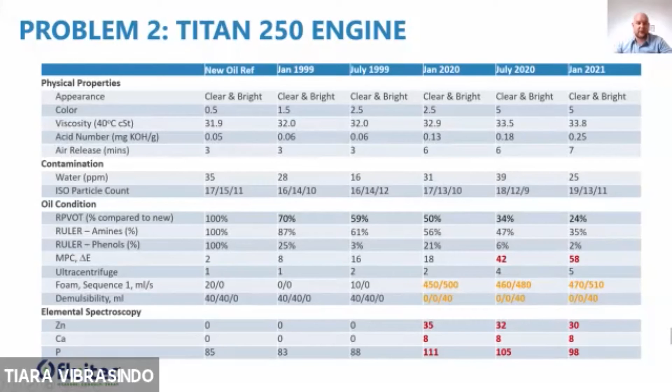So you really want to flush the system and change the oil in this case. As you can see here, foaming is critical, demulsibility is critical, and then you see here the elementals that are causing it, and the MPC value going up as well.

So the summary here for oil condition monitoring: you want to look at the two most important factors, antioxidant health and varnish potential. Please ensure that your oil analysis packages include these tests. Oil condition monitoring in general is pointless unless you have an action program as well, because very often we see that oil reports go into the drawer and nobody really does anything with it. You need to have an action plan in place in order to mitigate any problems.

So the final topic that we have for today is to talk a little bit about our solutions, Fluitec solutions that are in the market to mitigate varnish. We have two basic solutions for varnish in the market: fluid enhancement, known as Solvancer, or a filtration system known as ESP.

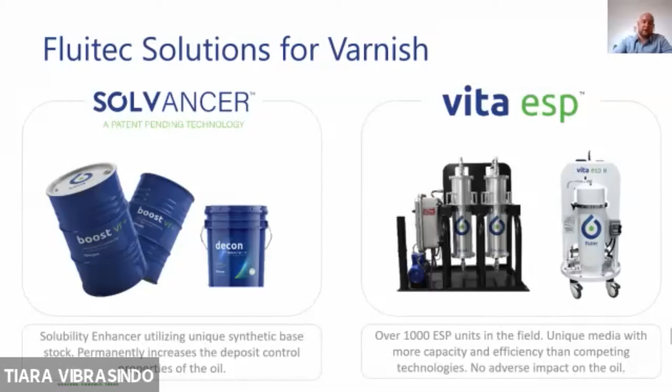Solvancer is a solubility enhancer. It's a unique product. It permanently increases the deposit control of the oil. ESP is a unique filtration system. We have over 1,000 units in the field, and we have a unique filter media which has no competing technology right now, and it can severely extend the life cycle of the oil.

So if you look at the fluid enhancement Solvancer family, based on this Solvancer technology, we have several products. The all-rounder here is Decon, the one on the top. Boost AO is for re-additizing the antioxidants. Boost AW is for oils that have anti-wear additive. Infinity Turbine Oil is our own turbine oil blended with Solvancer technology, which was shown in the TOST test earlier. Boost VR Plus is a product that is added to the oil as a flush before changing the oil. So Decon is the most all-round product.

Decon is the most all-round product which can be used in both a reactive or proactive way. It can be used as a correcting method. For example, if you see varnish potential shooting up and you want to correct this, you can add Decon into your fluid, but you can also add it as a preventive measure, as a proactive deposit control system, before there is any problem with your oil or system. You don't need a reason for it, but you want to prevent problems from occurring, so you add Decon into your system. This will be a long-term solution because Decon does not degrade, does not form any varnish or deposit inside your oil, so you can use it throughout the life cycle of the oil without any issues.

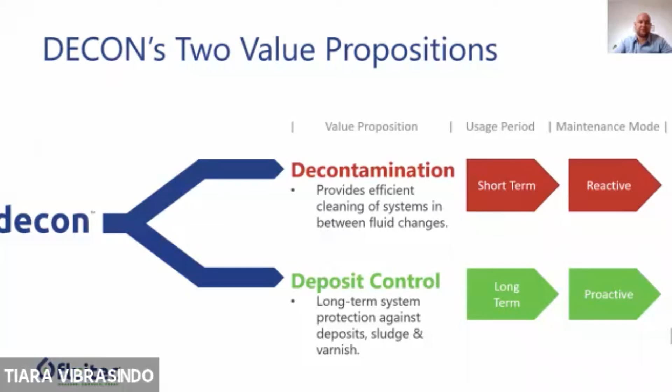Infinity Turbine Oil is the only turbine oil in the market currently that comes with a 10-year deposit control guarantee and is designed for additive refortification by our Boost AO. So this will provide a very long service life, and it's a unique oil in the market.

So when we talk about varnish, to understand our products, specifically the filtration, you need to understand that varnish is soluble. This is why it's so challenging to remove varnish from an oil, because it goes into solution. It's like sugar dissolving in your tea. You cannot take the sugar out anymore, but it can still be harmful to your system.

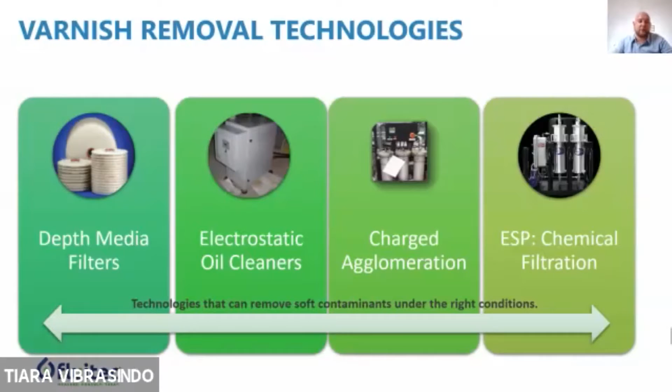So there are various technologies available in the market. You can have depth media filters, electrostatic oil change, oil cleaners, charged agglomeration, or a chemical filtration system. All these technologies can remove varnish under the right conditions. So we'll talk a little bit about the pros and cons of these systems.

If you have depth media filtration, the pros are it's simple and economical to operate. It has high dirt holding capacity, and it absorbs soft contaminants and also can absorb moisture. The cons of this kind of system is that it only works in low temperature operating conditions, and it cannot remove varnish that is solubilized. It can only remove varnish that's in suspension, meaning you have to reduce the temperature of the oil before you can take out the varnish. So this makes it only suitable as an offline system and not an online system for removing varnish.

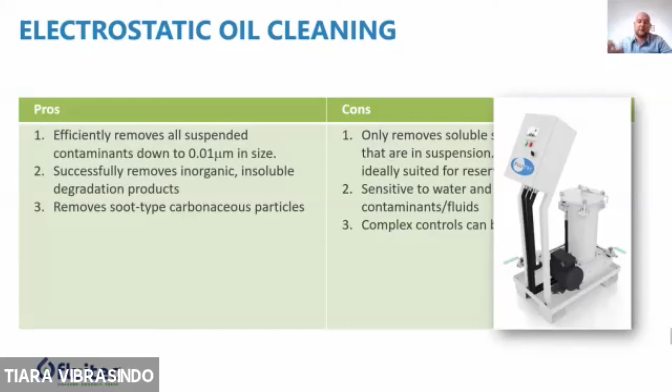Electrostatic oil cleaning has some pros, but it's also only able to remove varnish that is in suspension and not in solution. So also is only suitable as an offline system, and it can be difficult to operate.

So our solution of choice is to use ESP, or chemical filtration. The biggest upside of this is that it removes soft contaminants that are both in suspension and in solution. It basically is able to take the sugar out of your tea, so to speak. It is able to remove the varnish from the oil while it is in solution.

It has a wide range of temperature effectiveness, so it can be used as an online system. You just plug it into your oil tank, install it there, and it will work throughout its life cycle. You just need to take care of changing the filters in time when they are saturated, and it will keep the base oil clean and pure. If you remember, that's the main reason why we are in business, because we want to keep the base oil clean and pure so that it can provide its main functions.

It's also relatively simple in design and easy to operate. And the downside of ESP is that it does not remove inorganic contaminants, so it does not have any impact on dirt, contamination, and metals.

It works like this: when new oil starts to degrade while in service, due to thermal or mechanical stresses, it creates soft soluble contaminants in the oil, which can settle in the form of varnish, as we showed earlier. The ESP takes out these soft soluble contaminants and restores the oil back to new, keeping the base oil clean and pure. And the clean oil goes back into your system.

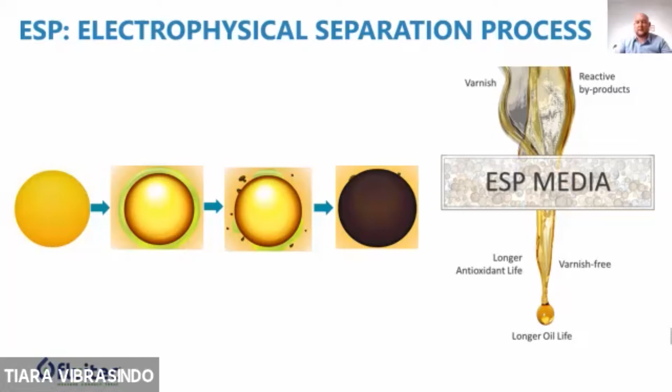So the process works by resin. We have resin media which absorbs soft soluble contaminants and keeps it onto the resin, and this will render the varnish inert. So it will also increase the antioxidant life and the general life cycle of the oil.

Here you can see an example of the media. You have fresh media in the picture on the left. You can see here the resin is not saturated with varnish. And on the right side, you have an example of spent media where it has absorbed all the chemistry, the varnish potential of the oil, and as such has kept the oil clean and pure. But this is also the reason why you would have to change filters every 6 months in this system, to be able to continuously remove the varnish from your system.

So this is the ESP resin in action. You can see here the resin media absorbing the soft soluble contaminants from the oil. That's ESP, which is a very effective and efficient system to keep the oil clean and pure.

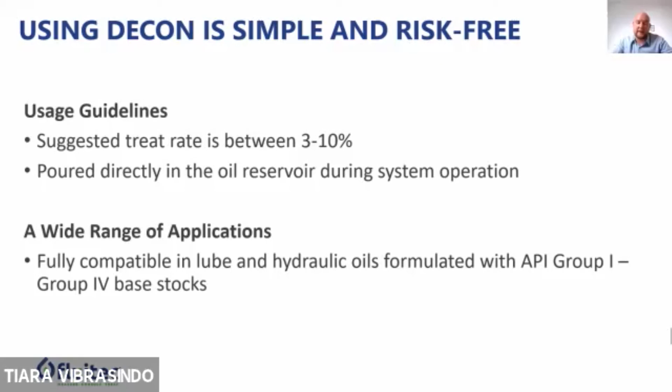We also have a chemical solution under Decon, which is simple, and typically Decon's treat rate is between 3 and 10%, and it can be poured directly into the oil reservoir during system operation. It has a wide range of applications, so it is also compatible with, for example, hydraulic oils and any oil that's formulated with an API group 1 to group 4 base stock. Decon actually works as a solubility enhancer.

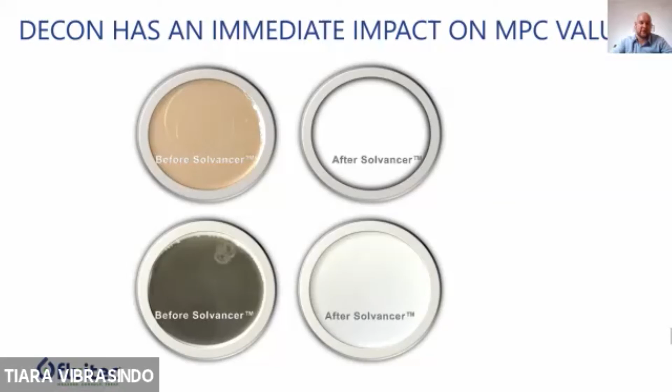It dissolves the varnish back into the oil, and as such takes it away from your equipment and protects your equipment from breakdowns. You can see the effect of Decon is immediate: before Solvencer we have high MPC values, and after using Decon with Solvencer technology, the MPC values go down and the patch becomes more clear.

It also has outstanding long-term performance. This is why we can claim it is risk-free, because in the TOST test it keeps the MPC low even after 18 weeks. Normally we test TOST for 6 weeks, but we extended the test threefold, and there has been no problem with varnish potential in this oil after it's treated with Decon.

Also in the real world, we have a lot of experience. This is just one example, but you can see an N2 feed compressor with high varnish potential shooting up to 60, after treating it with Solvencer we can see that the oil has very low varnish potential. This is over a span of 3 years.

And we have many such cases available also for turbine oils with high bearing temperatures. We can use Decon to remove the varnish from your bearings and to reduce the bearing temperature again.

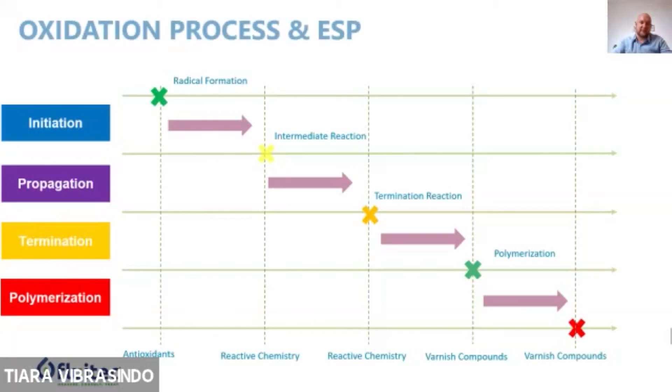So you might think, should I use Decon or ESP? Well, actually, the beauty of this is that you can actually use both. They work in perfect tandem. If you look at the oxidation process, you will see that ESP will take out the radicals before they start reacting with other chemistry in the oil.

So it will actually increase the life cycle of your antioxidants, because antioxidants do not need to be used as much to stop the propagation cycle, if you remember earlier on in the presentation. So ESP actually prolongs the life cycle of antioxidants.

Solvencer actually prevents the formation of varnish and gives you extended deposit control. So using an ESP and Solvencer will be the most ideal solution to prevent varnish formation and to extend the life cycle of your oil, all related to keeping your oils clean and pure and providing a risk-free solution.

So you can see this also when you test a turbine oil with Solvencer: the MPC goes down, but the antioxidants are not affected. If you test the turbine oil with Solvencer and ESP, you'll see the MPC is even lower, but the antioxidants are also kept in good health, and they are not depleted as fast as without ESP. So ESP actually helps here to extend the life cycle of the oil.

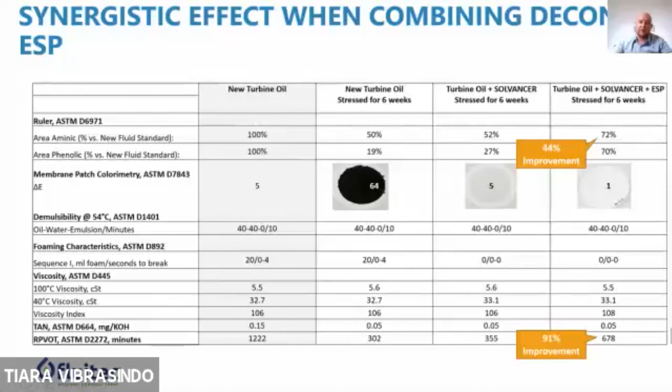You can see it in your RPVOT values here, where we have a 91% improvement due to the ESP system, with 678 minutes of RPVOT. So these two work pretty good in tandem.

So I would like to summarize a little bit about our products for varnish mitigation. It all starts with science, analyzing, and education for us. We want to share knowledge with our partners and with the market, such as we do today. Then it's very important to do condition monitoring, with technologies for RULER and MPC to monitor the most important aspects: antioxidant health and varnish potential of turbine and compressor oils.

Contamination control can be done with our unique technologies with unique filter resins, the predominant one being called Vita ESP. We also have Stealth EHC for phosphate ester fluids to blanket and prevent water ingress, Spark Free to prevent electrostatic discharge, and Endure 9s as well. Fluid enhancements such as Boost VR, Boost AO, Boost AW, or Decon, and Infinity turbine oils formulated with our Solvencer that are engineered to last the life of the equipment.

So that summarizes our products and brings me to the end of my presentation today. It's a little bit over time, but it's quite a lot of information that I wanted to share with you. I hope it was not too fast today, and I hope you have enjoyed this and it was useful for you.